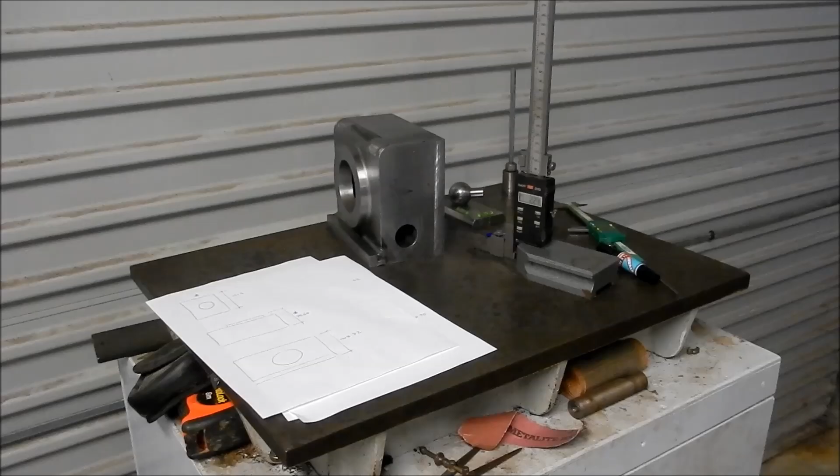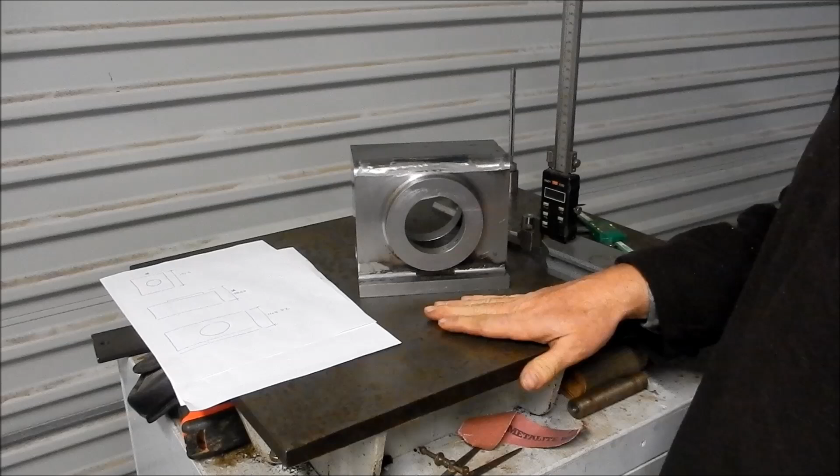We're back on my poor old venerable surface plate. That, as I said, looked like it was used by a blacksmith for making horseshoes. We're doing a survey on this. We've done our preliminary machining to get everything squared up, and now it's important to find out where everything's at. And it's important to sit back and do this little bit of a survey and take your time and get your thoughts together. And don't be rushed by it.

And if you're doing this sort of work in a work situation, it might be a very large job you're working on, it might be a big process line that you've been involved with, you're out doing some survey work on the site. Just to confirm a few things, just spend your time. There is nothing worse, and I've been there before, than being in the middle of a circle with 20 blokes pointing their finger at you when something's not right, and it is a horrible situation to be in. So do your due diligence, do all your checks, and take your time and be right with it.

If you're not happy with what you're seeing, or something doesn't seem right, go back and check and recheck. Don't take it for granted, all right? Spend your time.

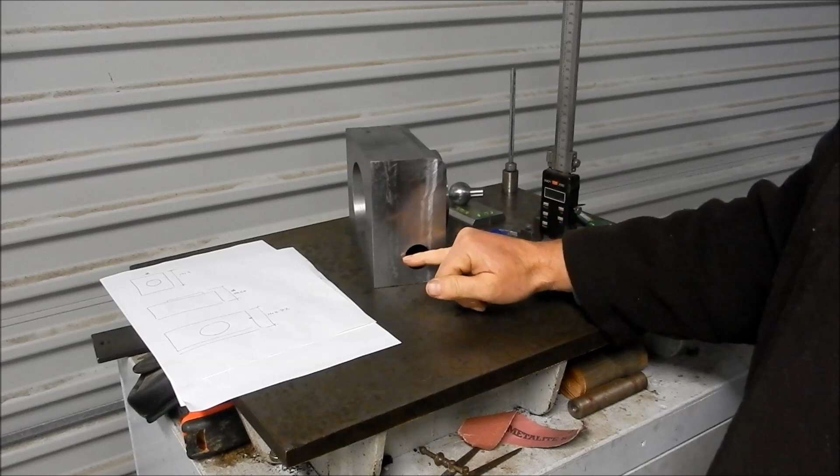Alright, so as I said, we've used our little buttons in the past as our reference lines, and as I did mention, we're going to use this particular bore as our reference point for everything to work to. We've got 3 or 4 millimeters of thickness in here on the wall, so I don't want to play around with that too much, so everything can follow on from that bore. So all the faces will be to that bore. The larger bores will be referenced off this bore as well, so if they come up and down a little bit, so be it, but that's going to be my datum bore that I'm going to work to.

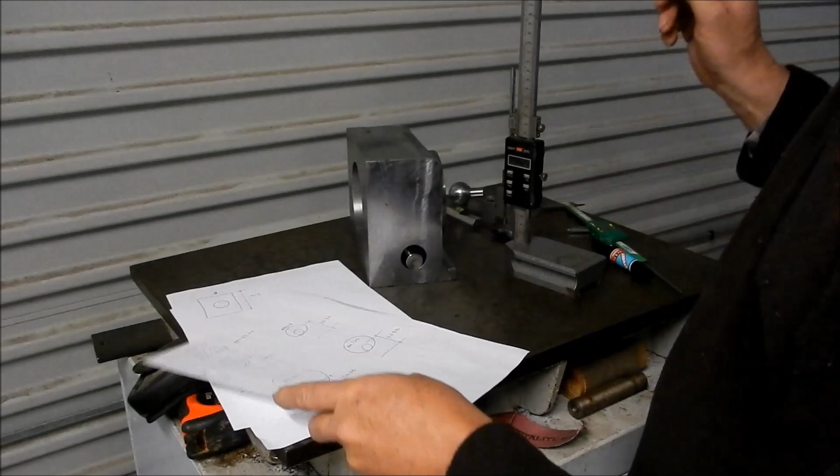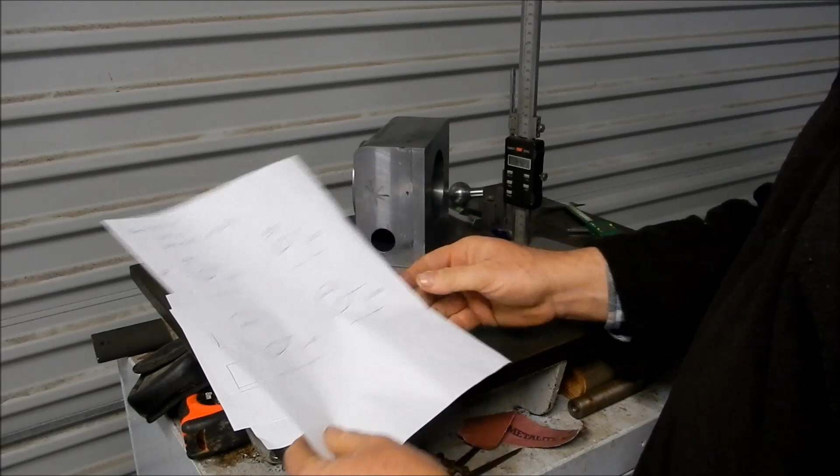So I've gone through and I've done my reference checks, as I said, just inside there, touching off, writing all that down and surveying it. So I've got a number of sheets here that I've gone through and surveyed. What I also do is I mark a datum point, a witness point, just on one of the faces, so when I'm putting things together, I know that that's that particular side there. I use that also when I'm doing all my horizontal and vertical checks as well. Just mark out where that reference point is. Makes it a little bit easier when you go back to the CAD to start playing around with things.

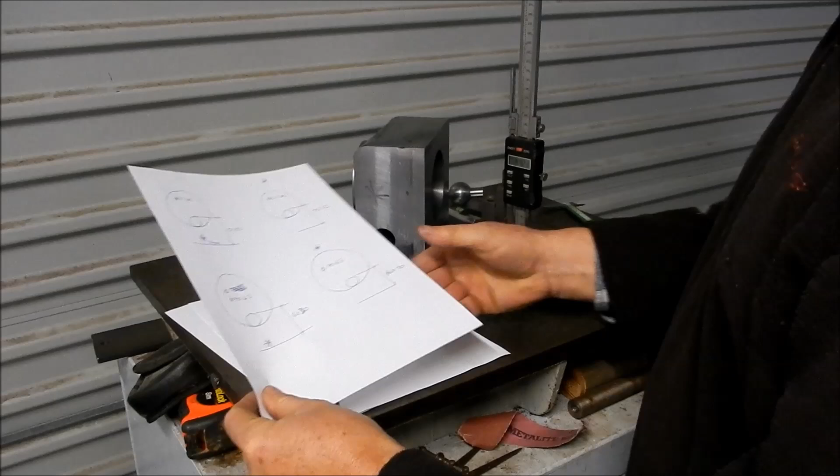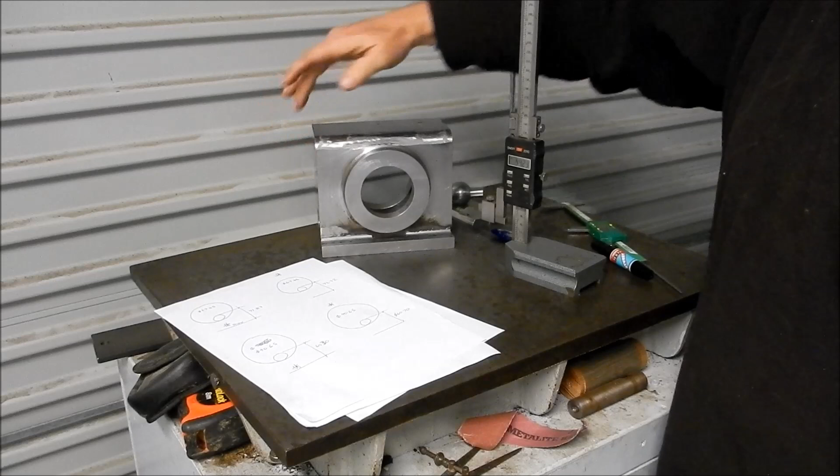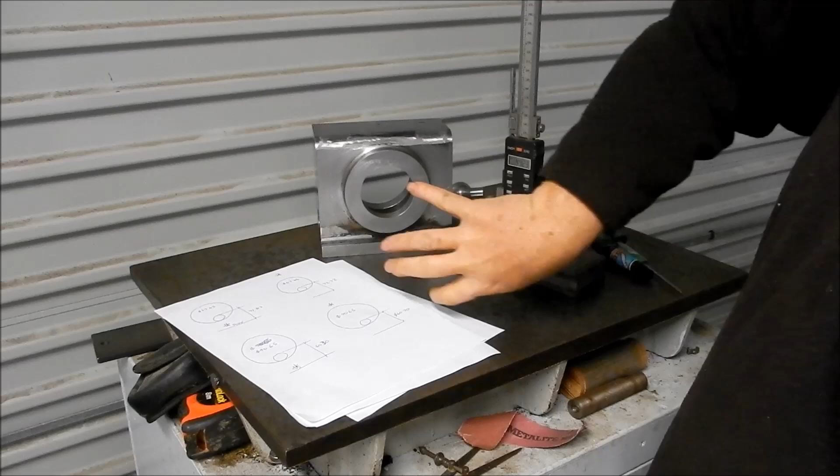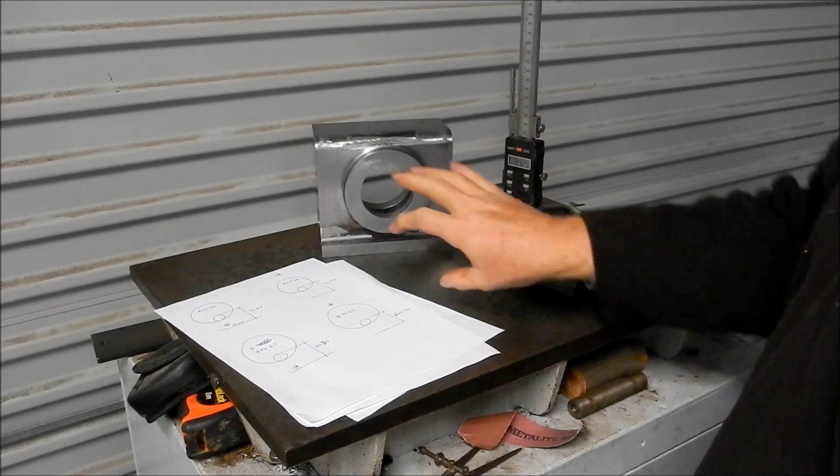So I've got all my bore locations, exactly where everything's at, in reference to bases, and my overall heights as well. As I mentioned before, on this particular one here, 71.83, 72.32, so I've got about 0.5 millimeter that's biasing one way. I've got 1.5 mm still to come off that width. So I'm going to try and bias that a little bit to bring that ring in, so that when I bore this and that housing goes on, at least those two diameters are going to be reasonably concentric. It's going to look aesthetically fine when that housing goes in. So I'm going to go back to the CAD now and have a look and see what the lay of the land is.

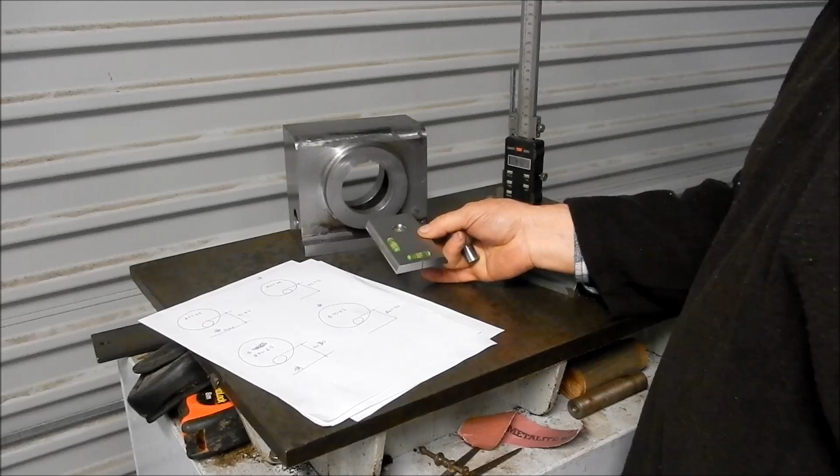Just one other thing I've been doing lately too, we've had a heap of instruments that I've had to make up, and I've got another little instrument called a line marking tool. This is a little instrument that I've developed at the moment for a company. So my little prism, that's my datum or my standard that I use, sits in there, and it's got little bubbles in there and a few other little bits and pieces. So this is a little development tool.

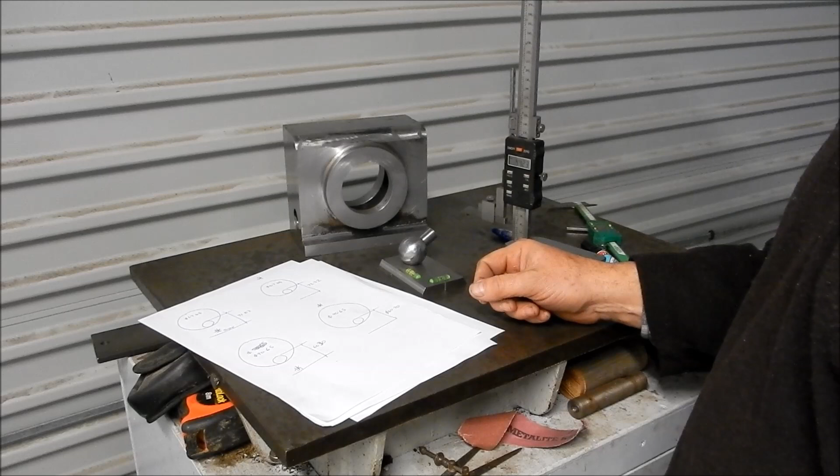So if you've got a little workshop and you've got some ideas on little tools that you can make up for a particular company or a particular industry, a little bit of extra cash, great idea. It takes a little bit of time to muck around and get things right, and dealing with different people, but in the end, when you get it buttoned down, it's well worth it. So I have a little suite of these tools that I use now, and I'm developing more to go with it. A little bit of extra cash just to help out with some of the purchases in the workshop.

All right, we'll head back to the CAD and we'll get these laid out, see where we're at, and come up with a machining plan.

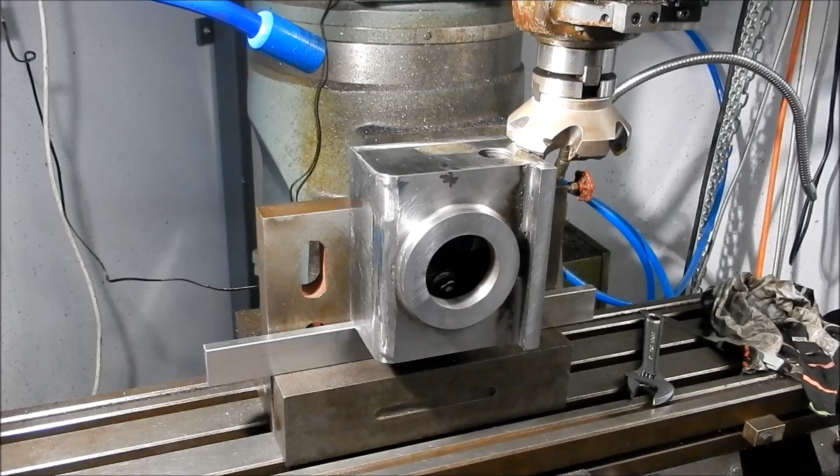Alright guys, back again. Just completed a survey, and I've done the quick layout on the CAD just to find out where I've got to take material off, just to balance everything out nicely. So at that asterisk point, or that datum point, that datum edge that we talked about, I've got to take off 0.56 off that face.

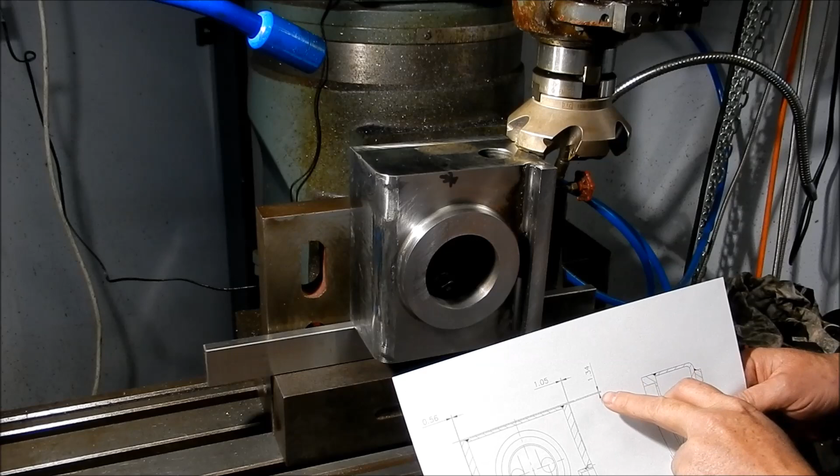And the bottom face down here, that's going to have roughly 1.05 taken off it, but we'll just use the vernier height gauge. Once we've got that one done, we'll flip it over, use the vernier height gauge, and we'll bring that back to the width reference on the drawing.

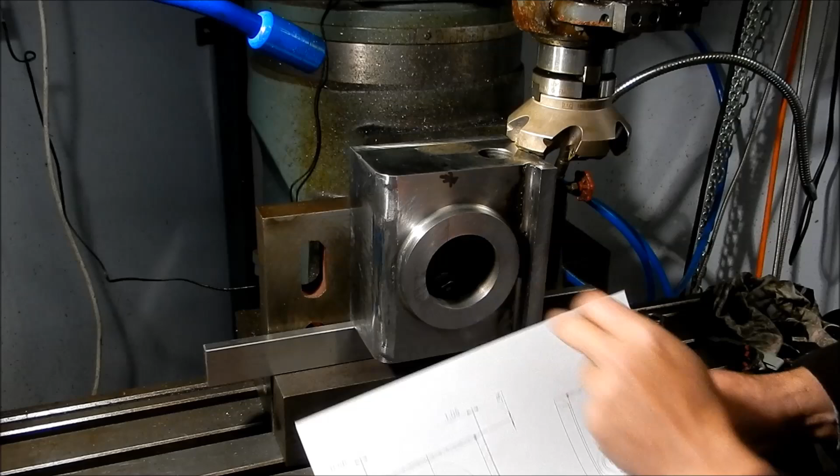On the base, got to take off 0.58 off the base to get my bores pretty spot on. On the big face at the back here, I've got to take off 2.66, and off the ring here I've got to take off about 1.98. And that'll get everything where I need it, where I can start setting up to do my bores.

So the way everything's sort of panned out, yeah, about 0.5 millimetre to take off the bottom. I only had 1 millimetre to take off that, so that's pretty right. I'm pretty happy with that. The top had 2 mil to come off it, and I've got 1.34, so you know, everything's sort of panning out roughly where I'd expect it to be.

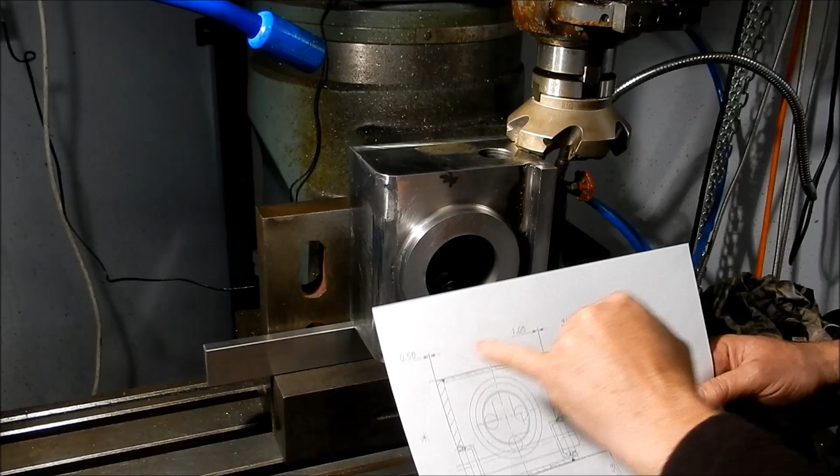So we'll get set up. We'll knock this 0.56 off this face here, and we'll set up, and we'll do the base, and then we'll machine everything out to length.

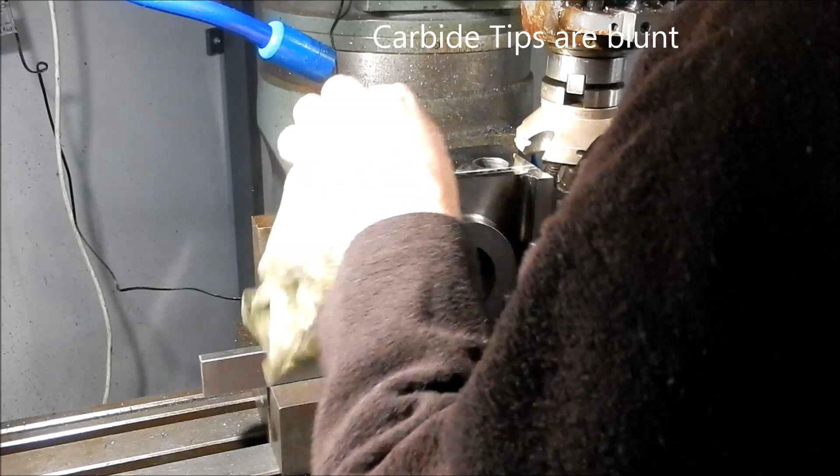Yeah, those welds are quite hard. I'm giving this poor old cutter a hard time. Fair bit of vibration in that. I might just take a very, very light skim pass over that and see if we can take that out. I might just clean up that little step over there first.

Wasn't sure if that was the belt squealing or the birds outside.

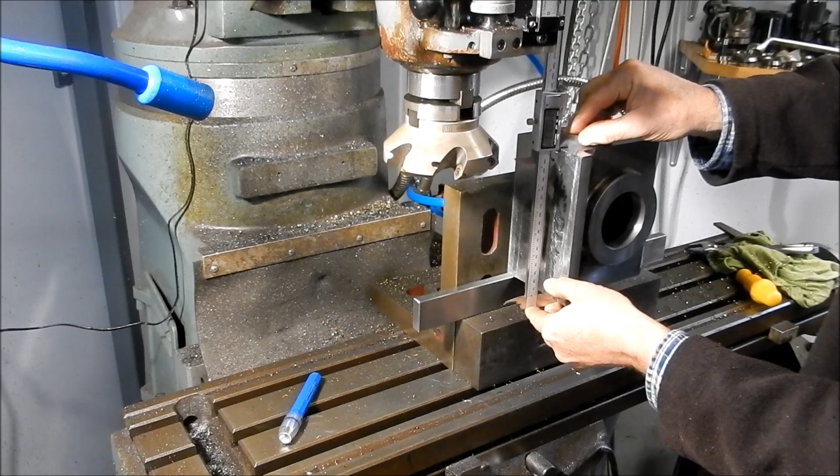Right, let's see if we hit the 170. That's what we're aiming for. 170.01. 170.00. So that's good enough for me. Right, we'll set up and we'll do this bottom face. So we've got about half a mil to come off that, and then we'll knock the top face down.

Righto, so we've got to take off 0.58 off this bottom face to get us within a bull's roar of our centre line of our bores. So we'll set that up now. Right, we'll take off a very light skim pass, and that's it.

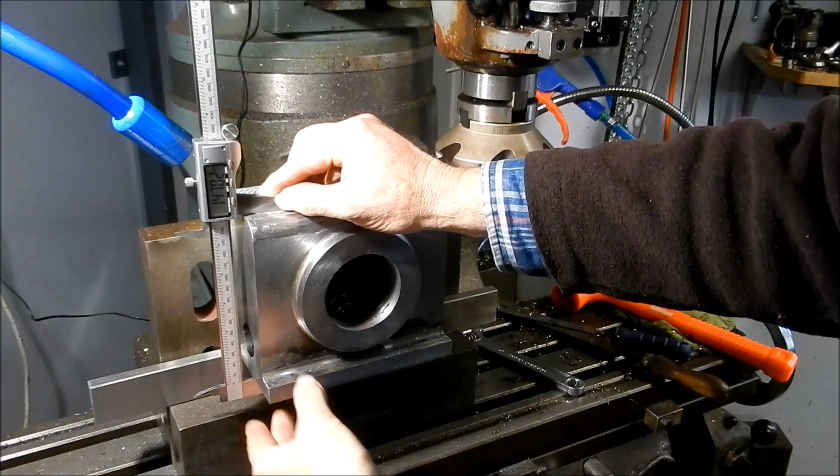Got 100% cleanup on that top face. Let's just see where we ended up on that. 147.02. Yeah, I'm not going to worry about 0.02. 147.02 as well.

Right. Next step, we're going to machine the two faces. And unfortunately, I should have put this angle plate further towards this way than I could have set it up beside it, but I'm not going to have enough room to run that out, so I'm going to have to break the angle setup, then machine those faces, then put the angle back in again to set up for doing our bores, which is a bit of a pain, but anyway, part of having a home machine shop. So let's get set up and we'll get that on the go.

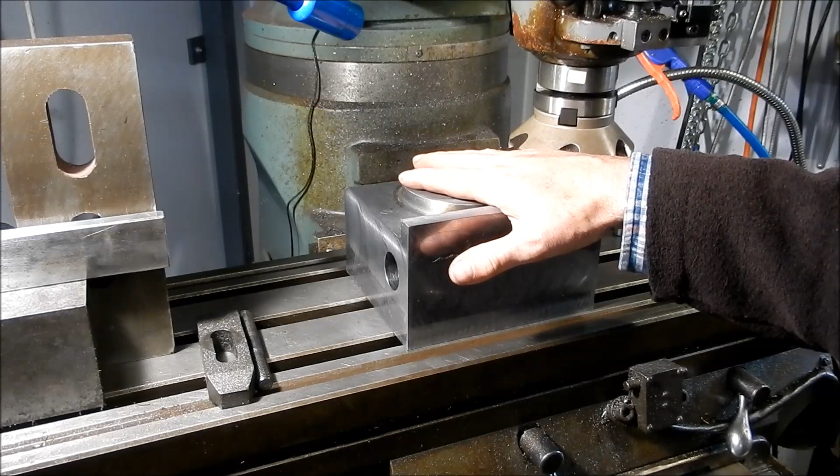Right, I've got to take about 2.2 millimeters off this top face here. And this is going to be one of my reference faces that I want to set the bore to. The housing that's going to go in here is going to be holding that worm wheel. So I want to set the center of that worm and that worm wheel so that they're both in the same plane. So this is the datum point that I'm going to be using for setting up for those bores.

We can tweak that a little bit on that housing. We can machine a little bit off the flange, or not machine quite enough off the flange and get that fine tuned, but we might as well try and aim for the best we can.

Right, I'm aiming for 96.41. 96.41 is what I'm aiming for. I can take the material off the front face. So now we're at 96.58. 54, 56, 54, 55. Right, 96.55. So 0.14 to come off. So I'll re-zero the digit. Turn that off.

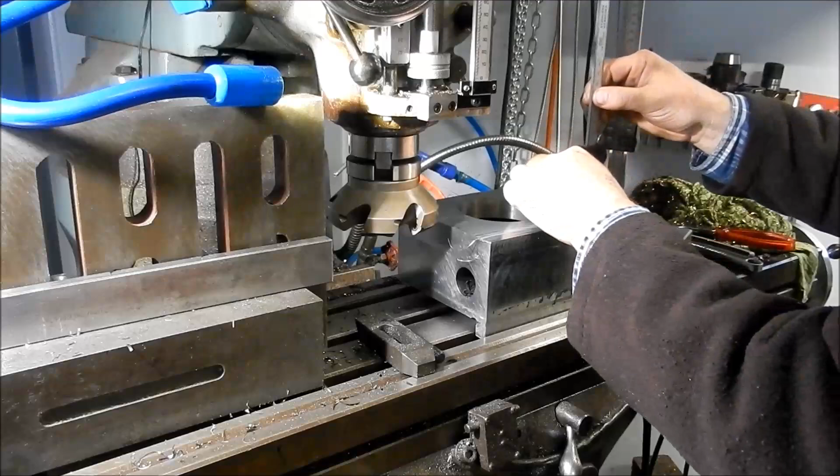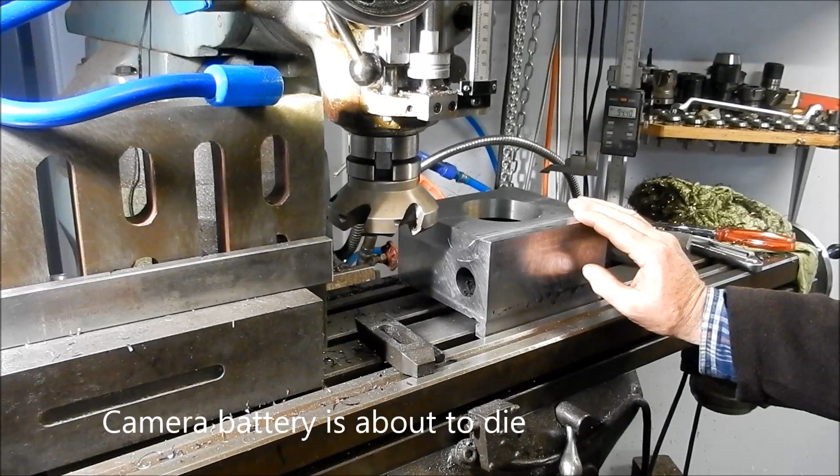94.43. 94.43. We'll work on 94.43. So 0.43 of a mil.

Alright guys, you'll have to excuse me, I've got a little bit of a head cold at the moment. It's been absolutely freezing at work.

We're going to do a bit of a stop and prop here at the moment. I've got the CAD set up because there's a particular change that I'm going to make. Now, we've completed the machining of this housing all over, and we're about to start the bore work to be able to fit these bearings into place, and ultimately the worm shaft.

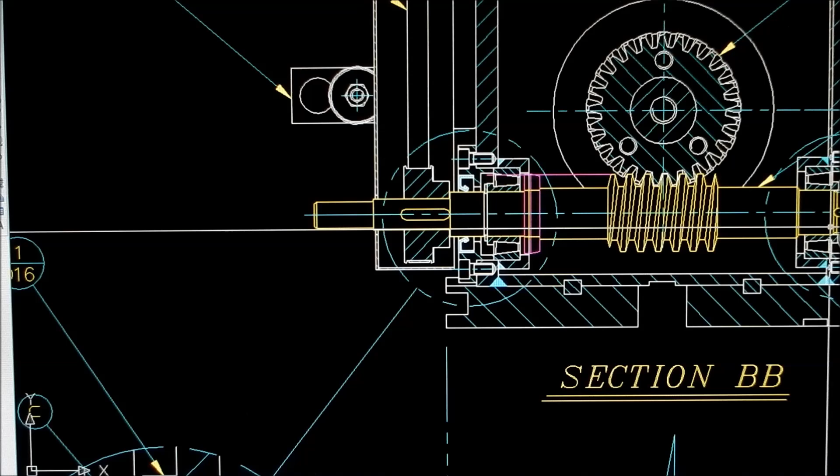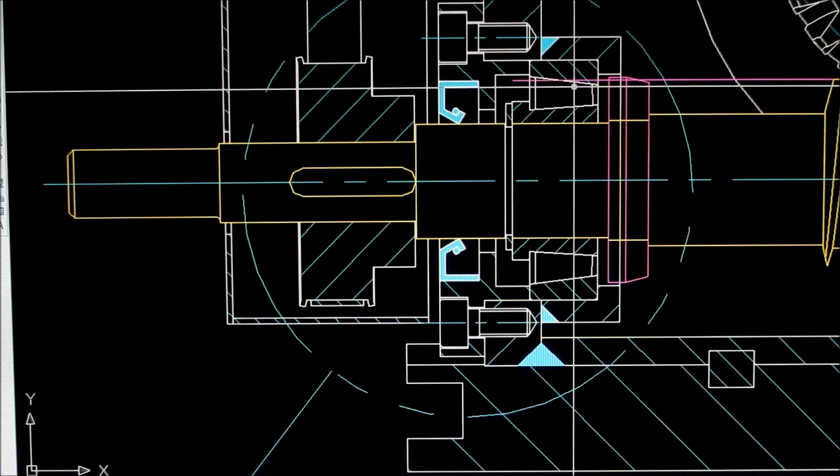One of the things I've been waiting on is some of those proprietary items, those bearings. So I've actually received all the bearings and all the seals, because there's one particular dimension that I'm not sure of, and unfortunately the catalogues don't tend to show this type of stuff on bearings, and I wish they would, because it would save an awful lot of hassle. And that is that inner diameter of the cup, so that you know what the envelope space is you've got to work with to get things through. Now, in this particular case, my worm is not going to pass that cup.

So there's a couple of things we're going to do. Ideally, it would have been nicer to put a larger bearing in here, but as you can see, I'm not going to fit anything much larger in than what I've got. I've really stretched the envelope space completely, with the fasteners, with the gaps I've got. Everything there is just really, really tight, and I couldn't really go to a bigger bearing. It would have been nice, then I would have been able to pass this worm shaft through. So we've had to compromise, and that's why I've gone with the smaller bearing diameters. But I was hoping that we might have been able to pass that worm through, but we can't. We're shy about 2 millimeters.

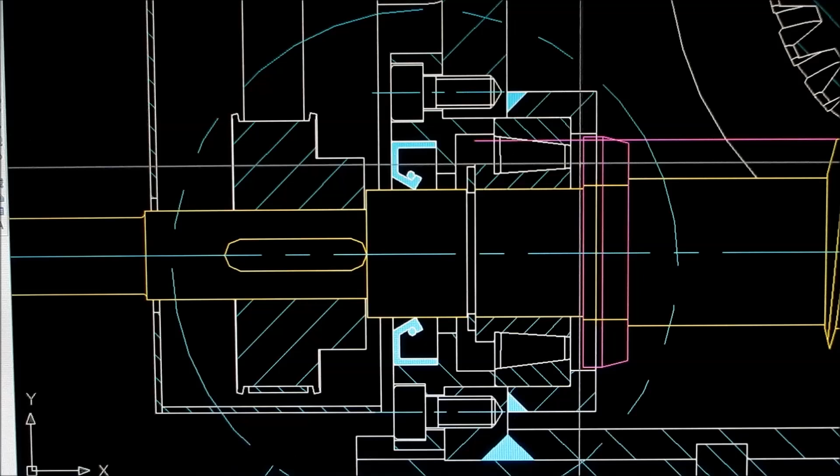So we need to design something in there that makes it easy for us to remove that cup with the shaft. Now, if I was just going to rely on the worm faces to try and push that out, I'm going to hit here, I'm going to get here, it's all going to be cockeyed, and it's going to get skewy, and it's going to jam inside that housing, so you're not going to have a hope of trying to get that out. So we need to put something else onto that shaft that's going to aid us, and I've put a thrust washer onto that shaft. So we're going to shrink that into place, the idea being when we go to punch that through, that face is going to kiss up, and that's going to allow us to take that cup out with the entire assembly.

I normally like to try and shrink these cups into place, ideally, on small bearings. On larger bearings that's a different story. There's different practices that we use for large bearings when we're fitting cups into housings. Sometimes you'll want them to rotate in the housing, and traditionally you'll try and look at 1 revolution per 12 months. That's ideal, so you can even that wear out.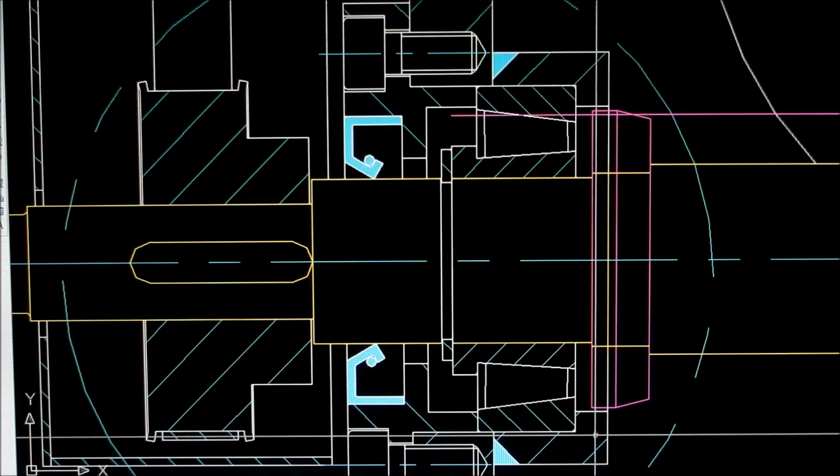Sometimes you don't want them to move, and you can actually dowel them in place, or there'll be a dowel oiler hole, so you're actually feeding oil down through that hollow dowel into the bearing. There's different ways that you can restrict the movement on those cups. And worst case scenario, if you've ever seen a big cup rotate in a large gearbox, it does tend to make a bit of a mess, and you can actually see a huge wear pattern. And the more that wear pattern gets, the more issues you have with your alignments of a lot of those elements. But for these little fellas, I like to shrink the cups in place.

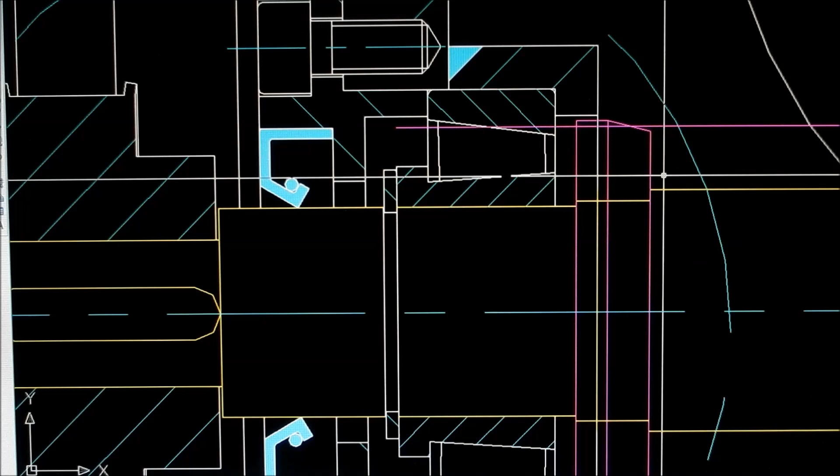So this one here I'm going to shrink in. This one here that I want to move out, it's going to be a transition fit. So it's just going to be a very, very light push fit into place, so that we can punch that out quite comfortably. So what does that mean? So I've changed the diameter in here. I've actually increased that out by another 1.5 mm. I've made sure that I've got a good land still there that I'm going to be able to butt up against, and the idea is that that thrust washer will then sit inside.

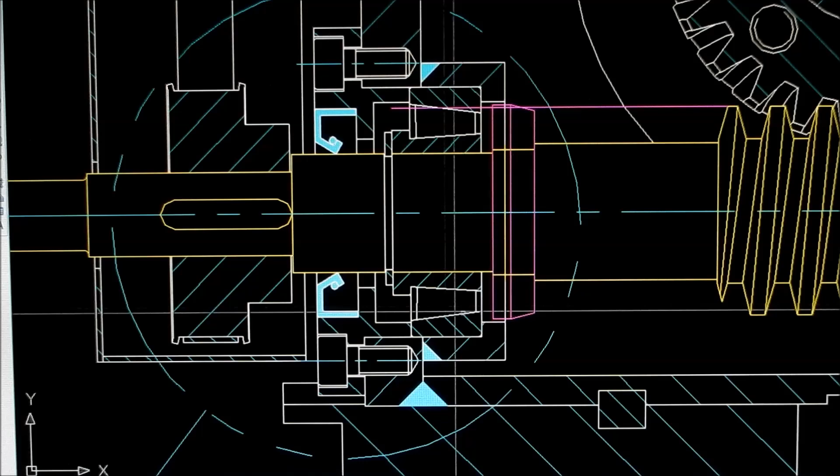The lubrication is going to be running up about 1/3 of that worm in practice, so that lubrication is going to be able to get through. I suspect that when this is actually rotating, it's going to act more like a labyrinth and prevent oil coming in. But if we've got oil in there to start with, we should be fine. So that's just a little update on what we're going to do. As I said, I was waiting until I got these bearings in hand to see how that was going to play out for me. So that's how we're going to go about it.

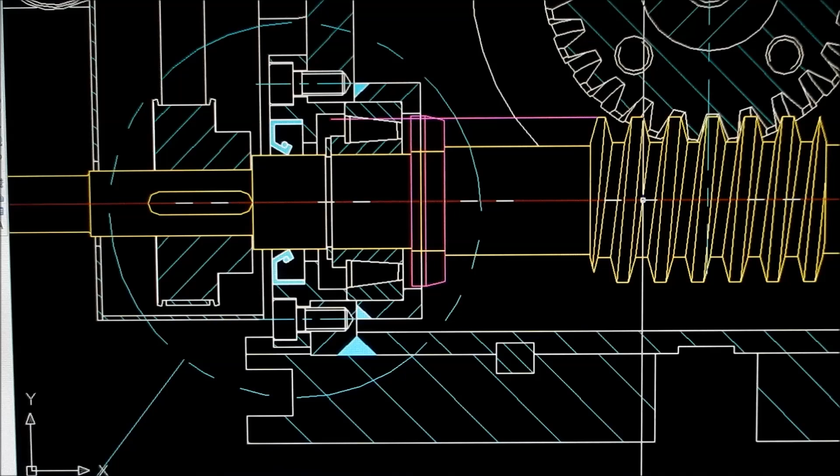Design is often about compromise, and you juggle a lot of balls to come up with the best fit for a problem. And sometimes other areas need to sacrifice, but you'll always try and minimise those sacrifices you've got to make in your design. Alright, so I'll re-detail that housing with my new dimension sets on that detail sheet, and we'll set this up and make a start, and we'll go through the methodology of how we're going to go about boring these housings in line. Alright, see you soon.

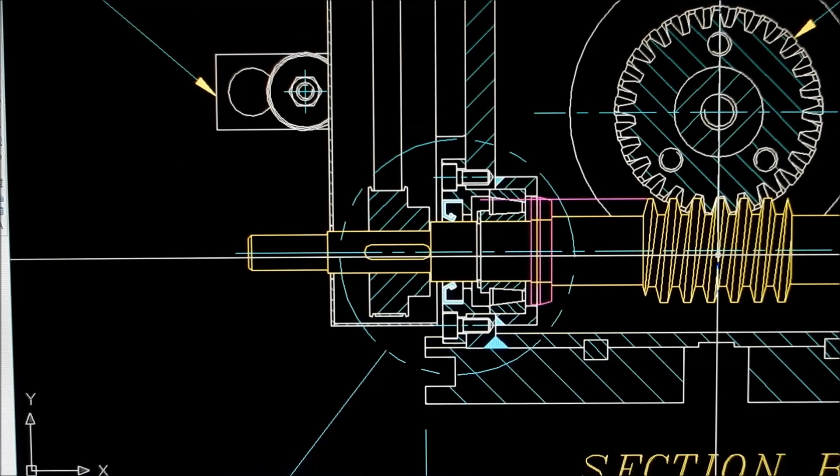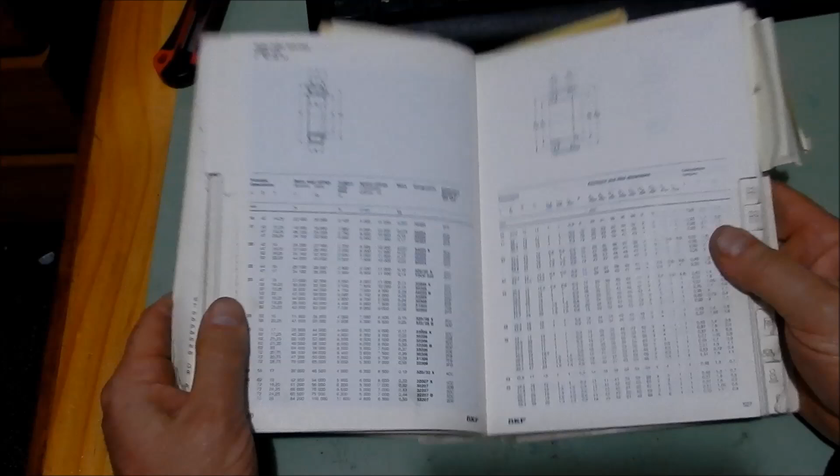Alright guys, before we go back out in the workshop, I thought I'd just go through some of the proprietary items that I've got off eBay, and this stuff's as cheap as chips. It's my old SKF bearing catalogue. It has been through the wars, and I've had this for many years, and had many arguments over it with bearing engineers in limits, fits and tolerances, bearing lives.

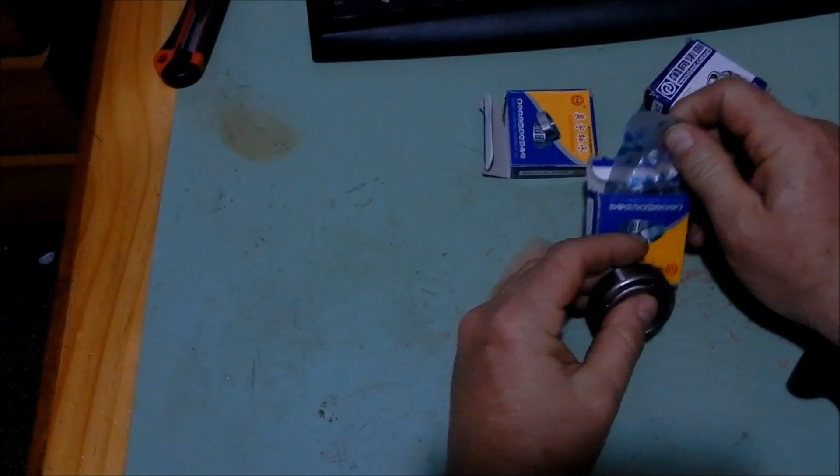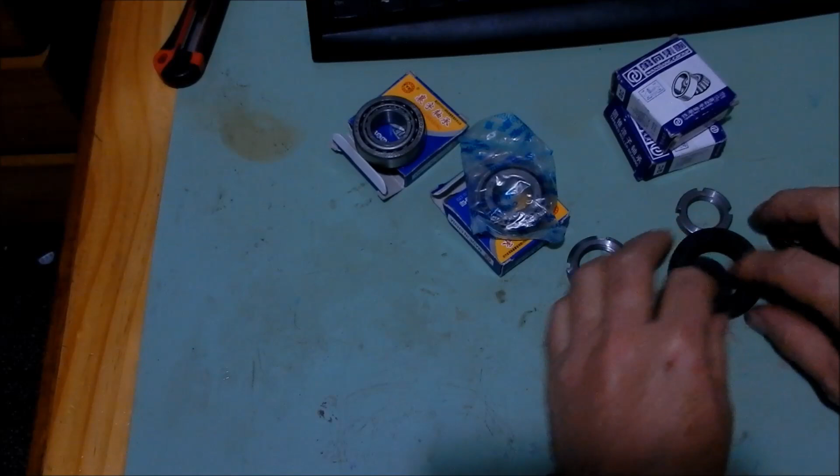Alright, so we've got all our bearings for the job. Always get very nervous when you get a bearing that arrives that isn't in its plastic packaging. For this particular job it's not an issue, but if it was a critical job, you'd be a little bit concerned. We've got our lock nuts, we've got our seals. There was one seal I did buy from my local bearing supplier because I wanted a seal that only had a single lip on it for this larger one of the crank disc. I'll go through why that was the case.

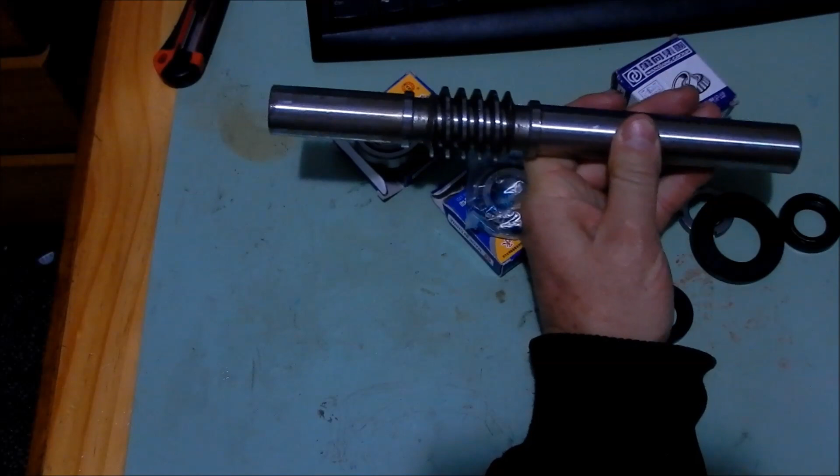Lock washers, and that's the worm and worm wheel I got off eBay. I think I paid about $60 for that delivered, so that's what we're going to be using. Obviously I'd like that to be an ally bronze or some sort of a bronze rather than the steel, but we're going to use a high pressure gear oil in this, which is hopefully going to afford us some protection. It's not under a huge load at all, so we'll see how that pans out anyway.

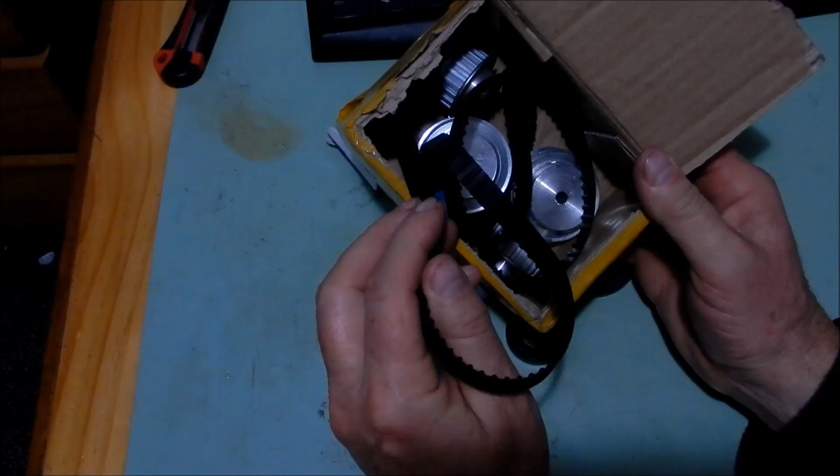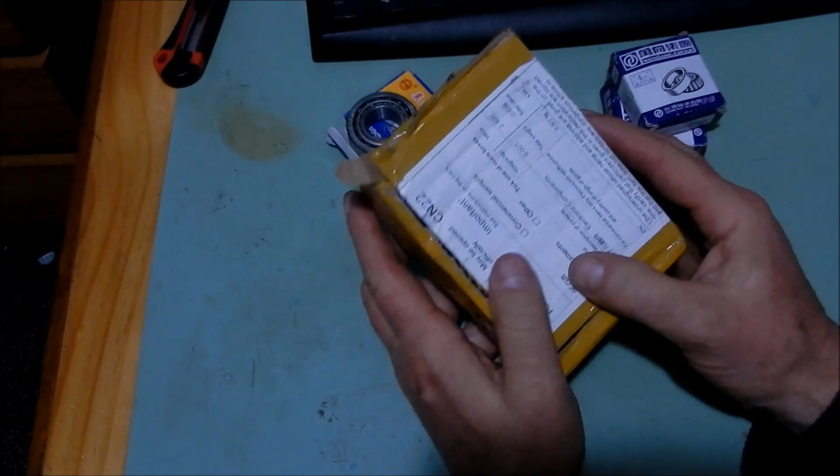I thought I'd just show you the bits and pieces we've got. I've got my timing pulley and my timing pulley belts in there as well, so got that all ready to go. I've got a couple of various sizes there so I can play around with the ratios, but as I mentioned before, I'm going to put a 3-phase motor on this with a little VFD so I can tune that speed up. Alright, so that's everything we've got purchased, and I don't think there's much else we need to purchase for this, other than a few fasteners. Other than that, I think we've got everything we need to get moving. Alright guys, we'll see you back out in the workshop.